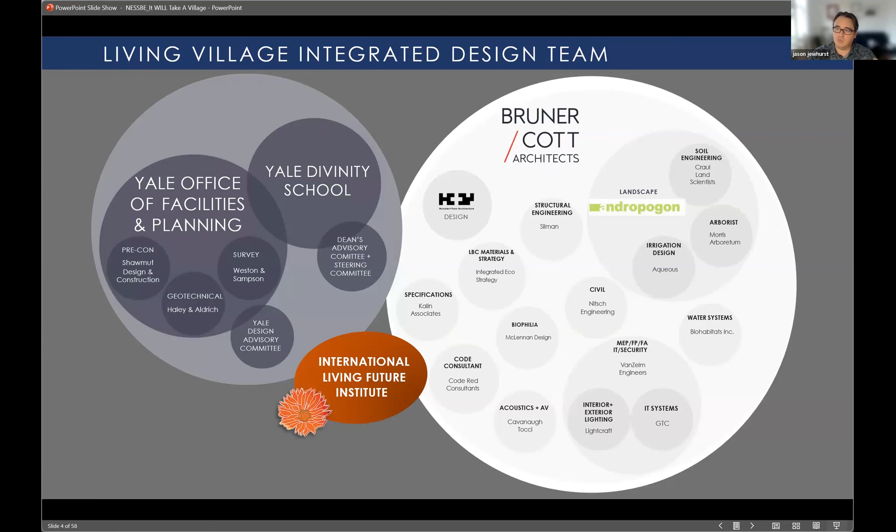We're also connected through this project to the International Living Future Institute. The Institute manages the Living Building Challenge building standard. We'll talk a little bit about that. This project from the very beginning, the Living Village, had targeted a regenerative design strategy that would be Living Building certified. So thinking through systems in a holistic way, we'll talk about that as we go through this.

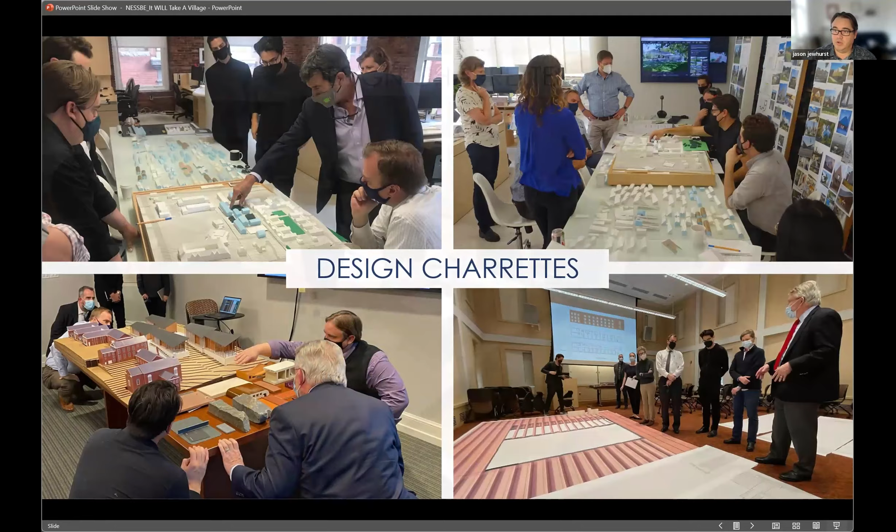I'll also say that we had a lot of fun, even though we were working through the pandemic, like many of us on the phone over the years. This design process kicked up in 2021. So we really kicked up the design process, and these were the first meetings we had in over a year that we were able to come together and think collectively about where we wanted the project to be. And that was rewarding. And like many of you, I'm sure, having that connection to large teams and working with the community.

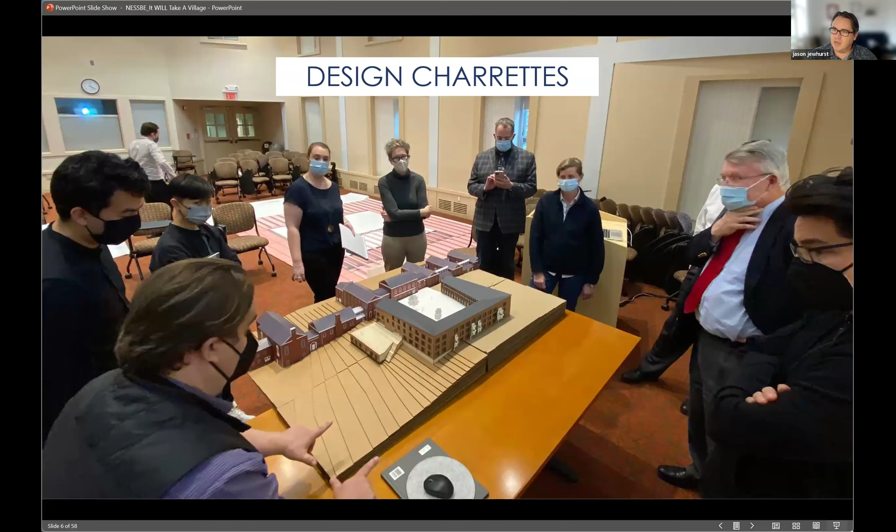So as we worked with the professionals on our side, we are also getting reflections and ideas from our clients. So really having an input that creates a shared authorship on projects like this. And we do think that that is such a critical part of our work, and having a true collaborative relationship with our team as well as the community we're designing for. And that's kind of how we think about it. We're only there for a very short period of time. The people living in these buildings will be there for decades to come.

So just real quickly, the vision for the Living Village. The dean had a vision over 12 years ago, thinking about how can we have our students who come through the Divinity School, how can they start to live like global citizens? How can they have a better relationship with the environment? And most importantly, how can we build community through architecture and landscape to foster these ideas and these conversations about how we live with the climate change that we're seeing? How do we begin to adapt? And then how do we develop behaviors that are more attuned and more connected to our surroundings?

And that boiled down into 4 goals. So it really is a training ground. They see the Living Village as a training ground for builders of communities that will go out into the world. Their students are generally going out into the world and helping people, making it an affordable place to live. Now, this is a graduate school at Yale where tuition is paid, but the goal for this is that the students that go to Divinity, if they show need, the goal is for them to go to school for almost free and $0 while they're staying on campus.

It's clear that most students that graduate from Divinity, they're not going into lucrative, high-paying or high net worth positions. They're going out in service of other communities. And this is a way to sort of make it more equitable in a place like Yale for students to come get an education and become part of that community, but not be burdened with the debt that so many students are seeing today.

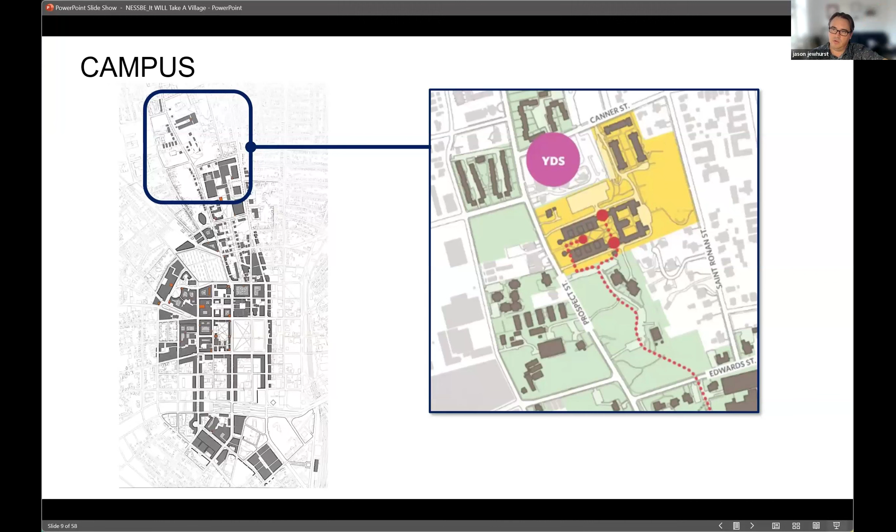And the idea and the design for both the landscape and the building, we're going to talk about this, is that in every way possible, it should be welcoming and inviting and setting a new course for them in the future. Just to give ourselves some context, if you've been to Yale Divinity School, then you know where it is. But if you haven't, it's up on the hill. It's a little bit separate from the main campus of Yale, and it's actually in the center of New Haven. But you'll see that it's a 15-acre site that has many historic buildings on it.

And what we're building on currently is we're looking at knitting together the landscape, removing this large parking lot, and connecting to existing buildings, and thinking about how that can work as one consortium of space. So a little bit about the Living Building Challenge. If you're familiar with the LEED certification process, if you look at Enterprise Green Communities standards, if you've read about WELL, what the Living Building Challenge does is it challenges the

group, and it also starts to think about, okay, as you think about LEED, as you think about sustainability, as you think about net zero, how can your project also begin to heal and regenerate and restore the surroundings, the environment, and the communities that they serve? So starting to think about pollution-free goals, thinking about not only creating enough energy to operate the building for one year as it moves in balance, but maybe generating a little bit more to give back.

So thinking about how buildings can be self-sufficient, how they can be more resilient, and how they can promote health and well-being through the materials that they're built with. So taking that step and thinking about what this project can offer beyond just minimizing its damage to the environment, but what can it do over time to heal that? On Yale's campus and in many cities, there are buildings that have been following the LEED process and going through LEED certification and pushing that elevation of sustainability and thinking about how buildings operate and use energy.

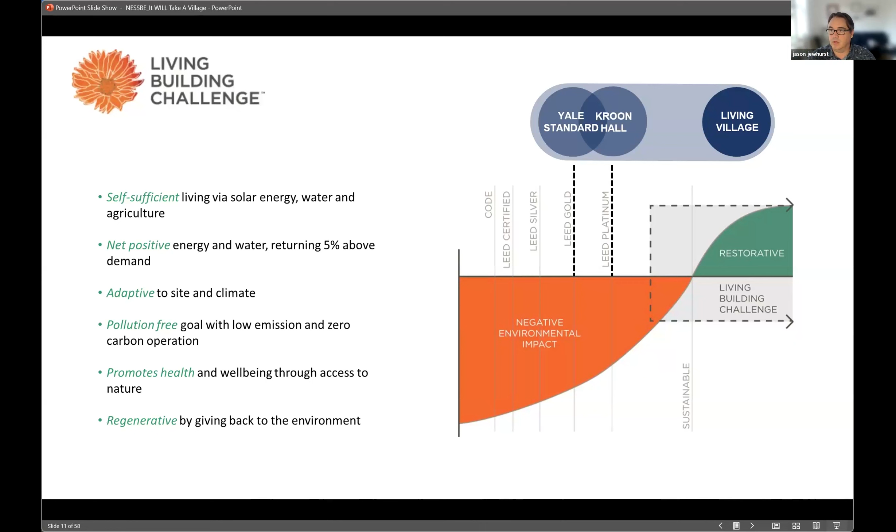The Living Building Challenge framework is, in a way, the first philosophy, advocacy, and building standard that brings together both halves of, I think, the mind and the brain, where it really focuses on the technical side in a holistic way of thinking about energy, water, materials, but it also starts to examine health and happiness. What does it mean for a place? What does it mean for a building and architecture and landscape to grow from its place?

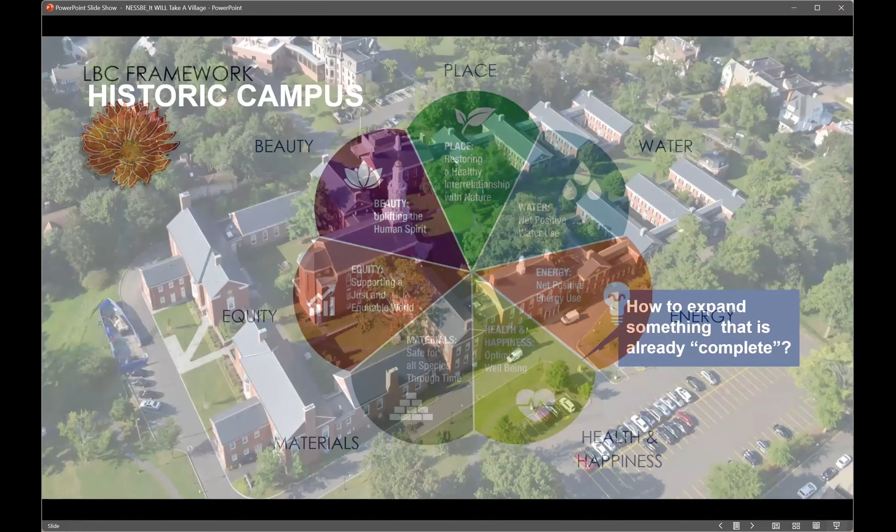Thinking about design and beauty as one, as sustainability, as thinking through this holistic lens. And then we're going to talk about equity in the materials as well. So thinking about how the buildings are actually built from materials that are not toxic. So thinking about a historic campus, expanding on a campus that's already built. It was built in the 1920s.

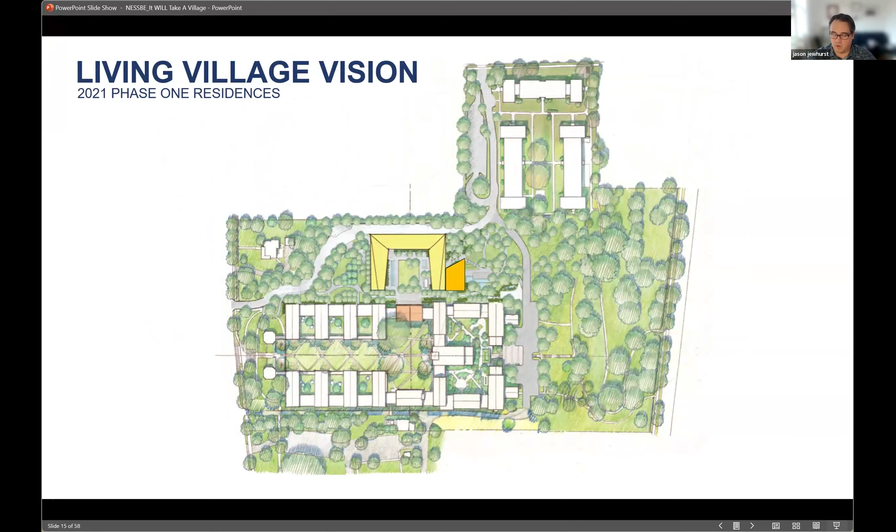It was renovated over the years, but ultimately you have a historic campus that needs housing closer to the academic building. So there is existing housing that was built in the 50s, and that's up on the corner at the top of the slide. And then the yellow is where the new Living Village is going to be sited and is currently under construction. So we're connecting the history and the architecture so that they're in conversation with each other.

And then just shifting really quickly, the vision was to bring a contemporary architecture that is at the highest level of sustainability and construction, but then having it be in conversation with the historic Federalist style, more modest buildings that are sort of sloping along this crest of the site. And this is the highest point. We're at the top of the watershed, which will be an important note as Jose talks through some of the site conditions. And with that, I'll hand you over to Jose.

So this happens to be located, if you go to the next slide, which is a bit more elaborate than the slides that we saw before, Jason. This first and foremost begins to actually knit the project with the rest of the elements that form this community in this part of New Haven. So there's the intention of connecting with some existing trails, taking advantage of certain institutions that are nearby, botanical gardens, farms and so forth, and make sure that this is outward looking, as opposed to inward looking, as Jason was making before. So we wanted to create something that was very permeable.

Now, being located in this particular part of the campus and regionally, we are at the top of a ridge line. The SDQ, the Sterling Divinity Quadrangle, actually drapes over the center, in the middle of a ridge line. So the building, in that regard, if you go to the next slide, please, is located right at the top of a watershed. Imagine that axis north-south that you see here right now. Water is going to fall to the east and to the west, so it's the highest place in the watershed. And I think that water becomes such an important element that begins to organize and respond to that responsibility that it has. Next slide, please.

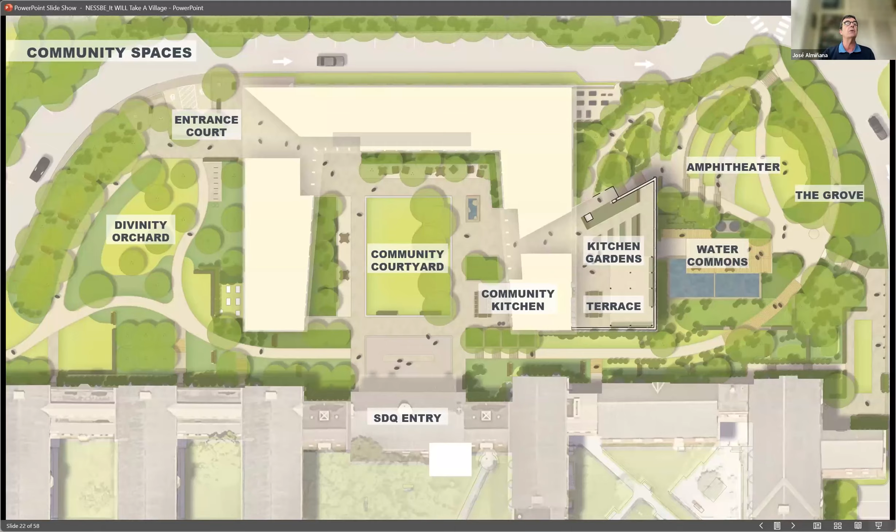Next, please. So with that in mind, we think about the campus connections that this plan enables, the connection to the deanery, the connection to the slope down to St. Ronan's, the connection to the courtyards inside of the quadrangle, and so forth. But it's, as you can see, very porous. In the next slide, you will see a diagram that describes the entry points of the village and how you move through it, in a way that has to be 100% accessible and universally accessible. Next one, please.

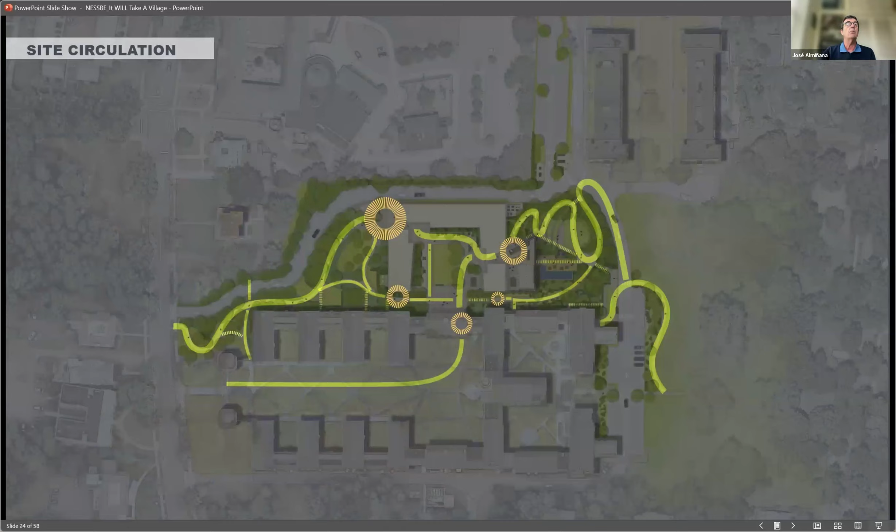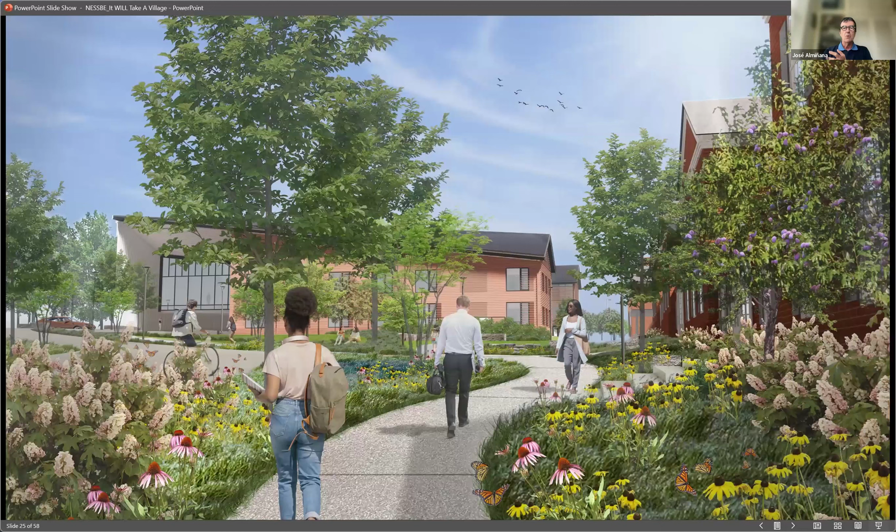So when you look at the next slide, it is a rendering of the fundamental pedestrian approach to the building. Go back to that one. You can see the intention of actually moving through the landscape. Everything that you see in this slide in yellow is a fully accessible route, so anybody with any disability can actually come here. There's a few places highlighted in red where we have steps, because after all, we're negotiating a change in grade upwards of 25 feet from the top of the ridge line to each edge of the campus.

Next, please. So you can see how the building is located on the site with the ridge line, with gravity working for us on either side, and the relationship to the entrance to the Sterling Divinity Quadrangle. And the next slide tells a story about how we are going to deal with water, because one of the imperatives of the Living Building Challenge is that we're net positive. We want to live off the water that is available to us on the site. So here we can use gravity, which is free, to move water to the places where that water as a resource can actually be utilized. And by the way, there's only one water, and we'll go into that in a minute.

Next, please. So the idea is that because we need to host a program here, the areas that need to be by definition impervious, i.e. the building roofs, are where we can collect the water from the sky and then direct that water to a series of cisterns where we can actually manage it and use it and reuse it on the site.

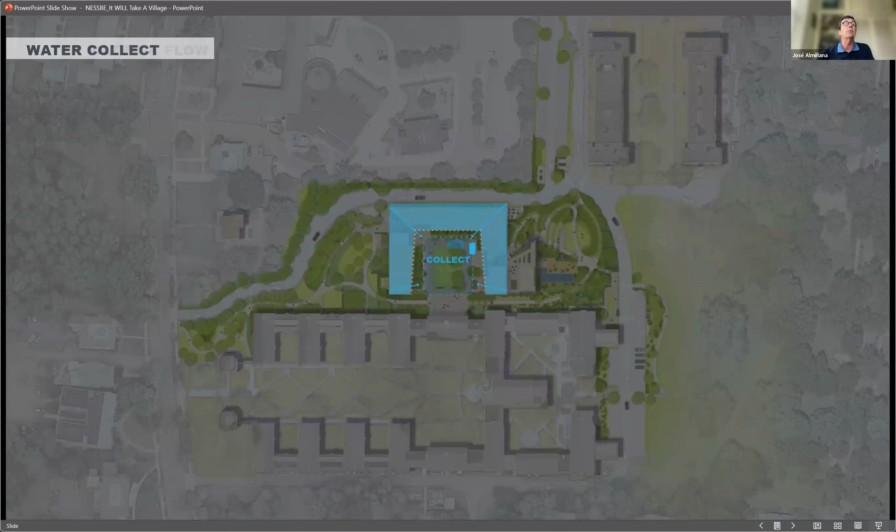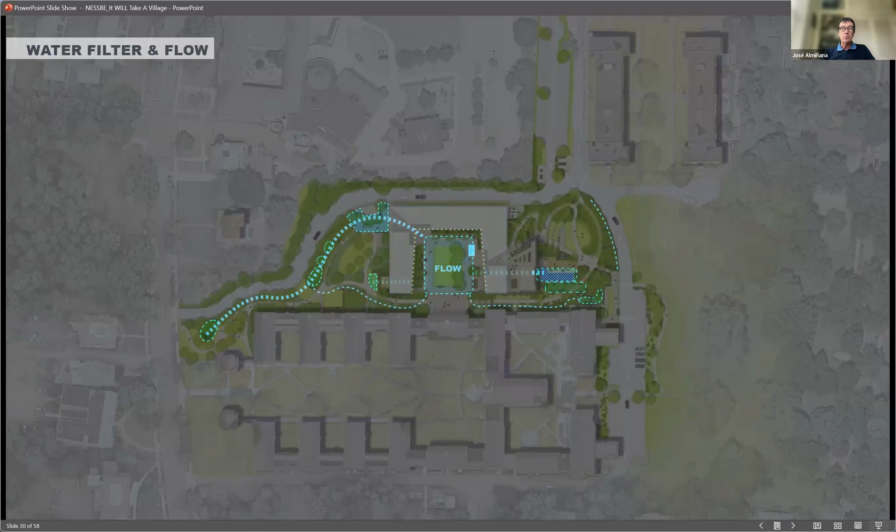So next slide, please. You will see how that water is actually directed from that high point through a series of landscape elements that would actually purify that water and actually manage what at the end of the day is a 100-year storm on site.

And that's done through a series of interventions that have to do with materiality, with alignment of the paths, and all that circulation that you have that is accessible. It actually follows that movement of water. So you are in contact with this aspect of the functionality and the living systems of the site as you navigate through it. Now, on the water question, the next slide is a little bit complicated. We'll try to make it simple.

This diagram here, this spaghetti diagram, is actually describing how the water that falls on the site is actually managed. So the next slide will show you where the water comes from, and it comes basically from three sources: either collected by the roof of the building, as I mentioned before, falls on the site from the sky, or is actually supplied from the municipal sources from the city of New Haven. That water actually is used in a series of different ways.

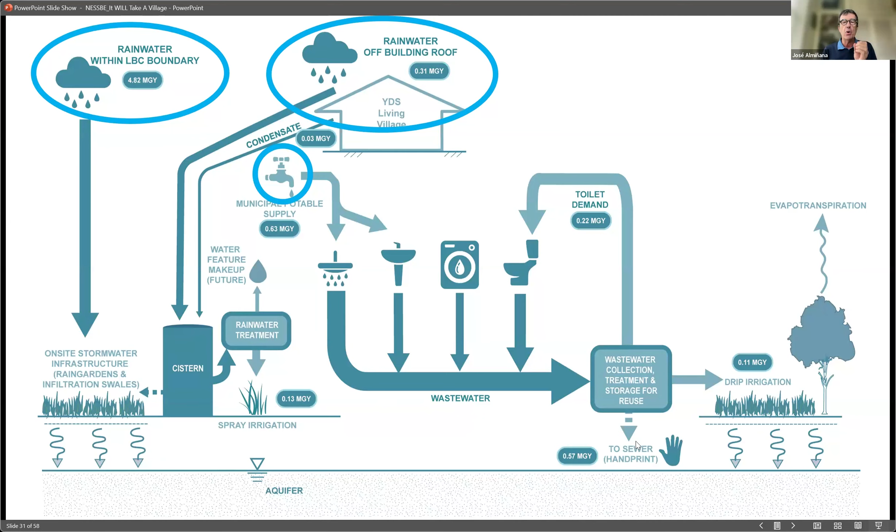In the next slide, you will see how that potable water is utilized for... becomes wastewater as being used through lavatories and washing machines and it becomes part of the wastewater system. That wastewater is then treated and collected and then reused for toilet flushing, or is used for drip irrigation on the site.

And the rainwater, which is the cleanest water that we have, we're actually going to take it to be able to irrigate our site in areas where we're going to be in contact with people. So we want to take the water from the roof of the building, put it in a cistern, and actually use it for spray irrigation of the site in areas where we want to actually grow food or need to maintain turf areas.

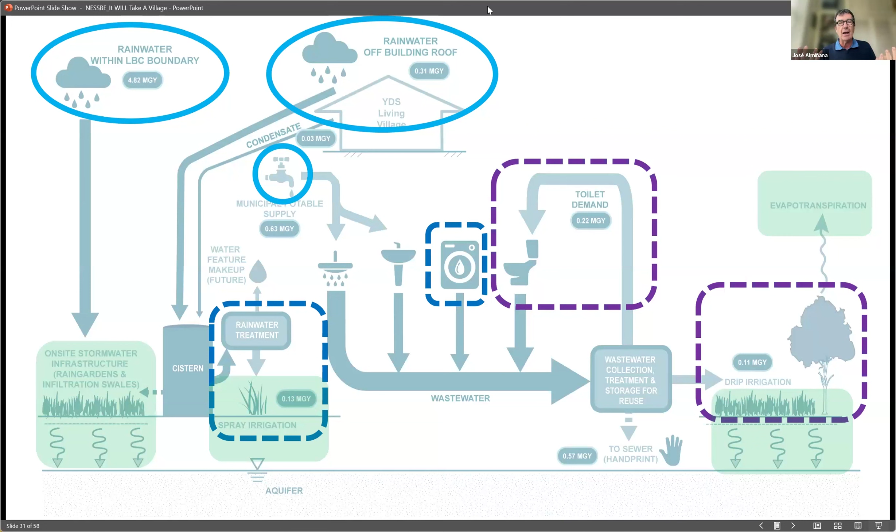And then lastly, in green, we reconnect that water cycle and put that water back into the groundwater system, right? Or evapotranspirate it, and then the water completes its cycle. And remember, there's only one water coming here. There's no water coming from anywhere else. It all comes from the sky, and it all goes back to the sky, or becomes part of the groundwater system, which we pump out and then make part of the hydrologic cycle again.

So next, please. How that engages in the building is rather elegant and simple here. The water is collected by the roofs, goes through a series of vessels and a series of pieces of equipment that actually treat it and manage it. Next, please.

Then it goes down towards what we call the water commons, which is where the water is actually collected for reuse, but actually the wastewater is circulated through a series of constructed wetlands where solar aquatics and the life that exists in the root system of these plants actually takes that waste, quote unquote, human waste, because it's natural waste, and it actually becomes food for the plants.

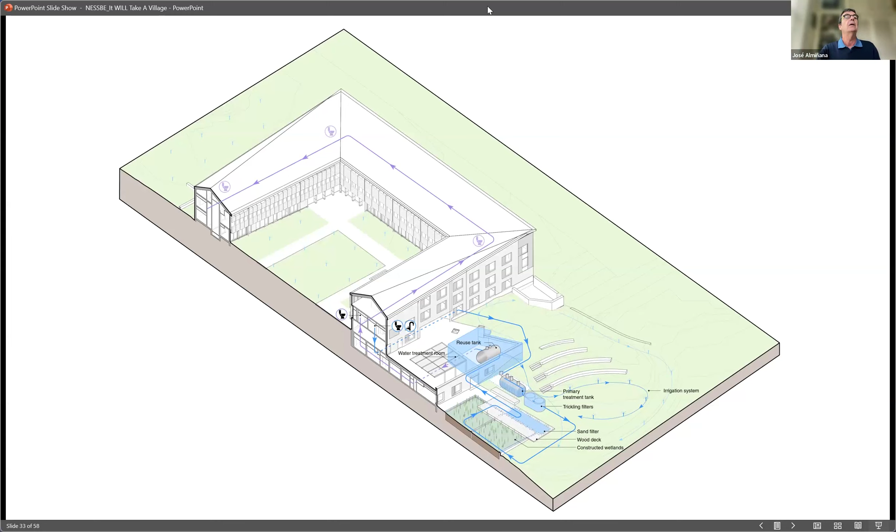And then the water is cleaned through photosynthesis in living systems. And then that water is utilized again for irrigation of the landscape at subsurface levels, or is used for toilet flushing, because that's the way we move waste in our sanitary systems to date. And next, please.

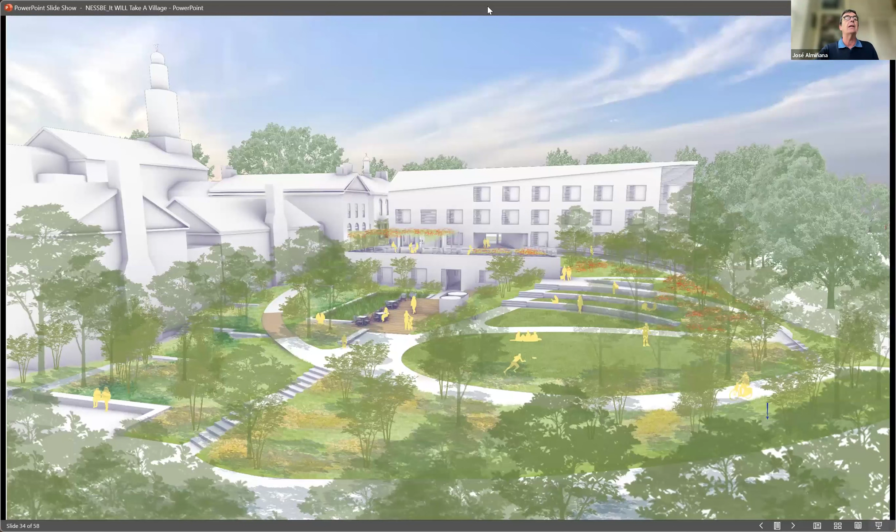Here is the eastern slope, as I mentioned before, which is the one that affords these spectacular views, but it's also where people can get in touch very directly with the way the water is managed. And this is completely integrated into the landscape features that you would see in the next slide,

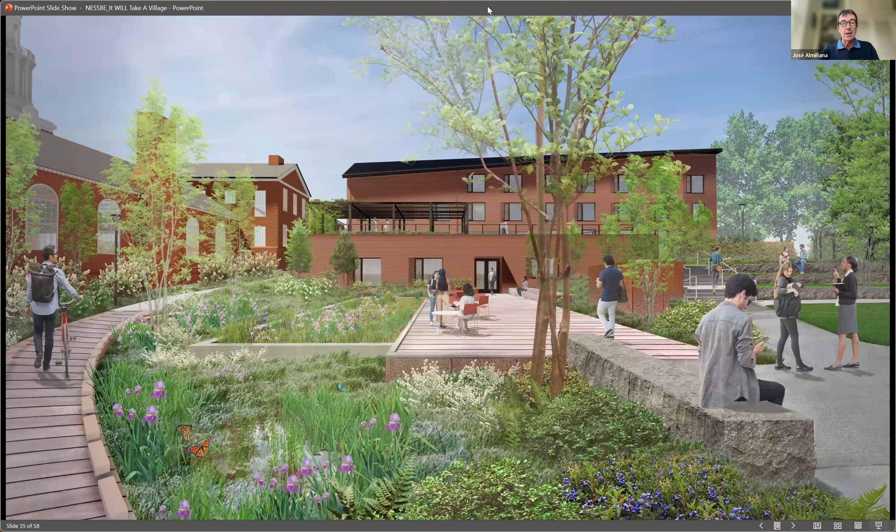where we have boardwalks that go over vegetated swales that manage rainwater, or you see decks and then constructed wetlands that actually are managing the wastewater. And it's all the same water, it's all integrated into place, and it's all experienced by everybody because it's completely accessible for people to understand.

Jason? Yeah, and so similarly, just quickly a review of how energy moves through the project. So this we call the U shape or horseshoe shape building. We were met with balancing contemporary new architecture that needs to generate electricity and power through renewable sources, but then also thinking about the context of the buildings that are on site already.

So thinking about these gable roofs, one of the elements that we wanted to bring forward in this design was to have the building shift its focus to what it is intended. So the roof is intended to provide shelter from the elements. It's collecting our water, as Jose just walked us through the life cycle of water as it falls on the site.

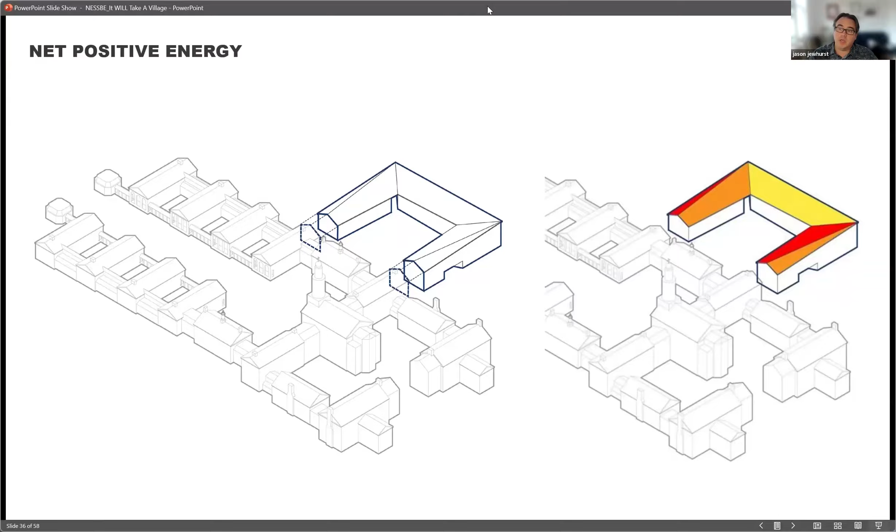And it also is to generate power. So what we were able to do was shift as the building wrapped around each side. And many of you probably know this, but I'll just say it: when we talk about energy being generated, we look at all roof surfaces in New England. So when you have a gable that faces east, west, or even south, those are all energy generating surfaces in the Northeast, because of the azimuth of the sun, the way it moves through the site.

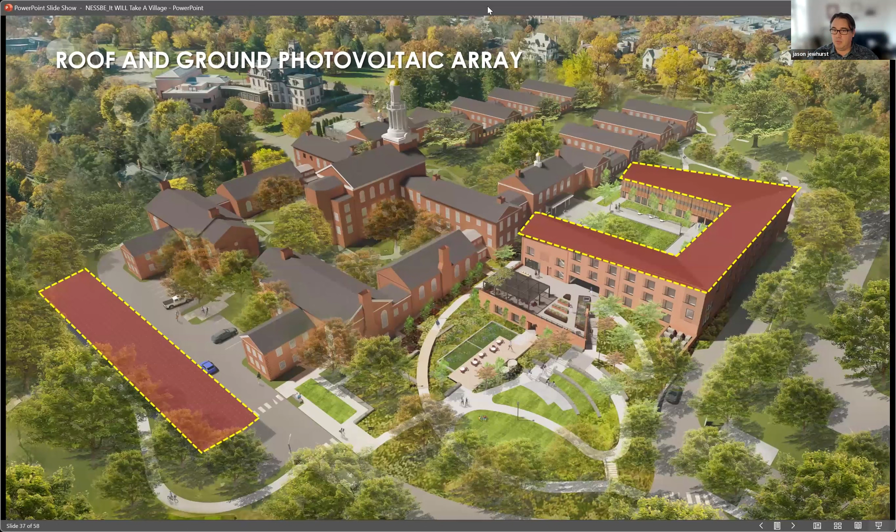So we have the benefit of having the sun move along the south axis, which opens up the roof and the architecture to capture 100%. So every surface of this roof, when we shift to that large shed roof that's not visible from outside the site, that's the entire south-facing roof surface. We are collecting other energy from another ground array that's going to go over a much smaller parking lot to the east of the site.

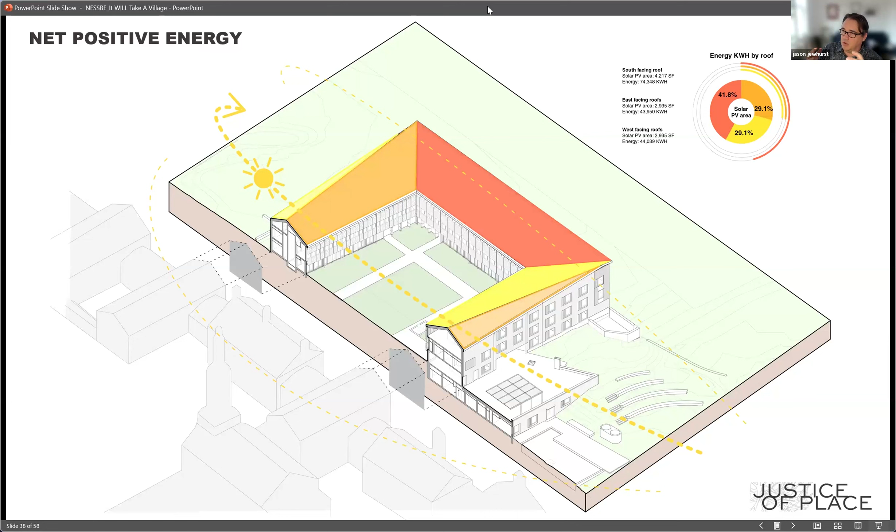But for the purposes of what we're talking about today, we're generating almost 60% of our power on east-facing and west-facing roofs. The other 42%, which is much more efficient and higher output, is being collected on a south-facing roof. So thinking about how the architecture tells the story and supports regenerative thinking, this enabled us to create a project with architecture that reflects and follows the sun, almost like a flower, or like how your garden moves over the day. This is doing the same thing. And with that, I'll hand it over to Gretchen.

Yep. So thanks. Jose and Jason have both talked a lot about the technical and the infrastructure that is a big part of this project, and it's what LBC, the Living Building Challenge, asks us to do. But the other petals I'm going to talk about are equally important. And that's what I really like about LBC versus, say, LEED programs, is that it takes things like equity as an equal petal. And so that is really about making community. This is a dormitory or grad living housing, but I think it's pretty applicable to co-housing models or multi-generational models of making community.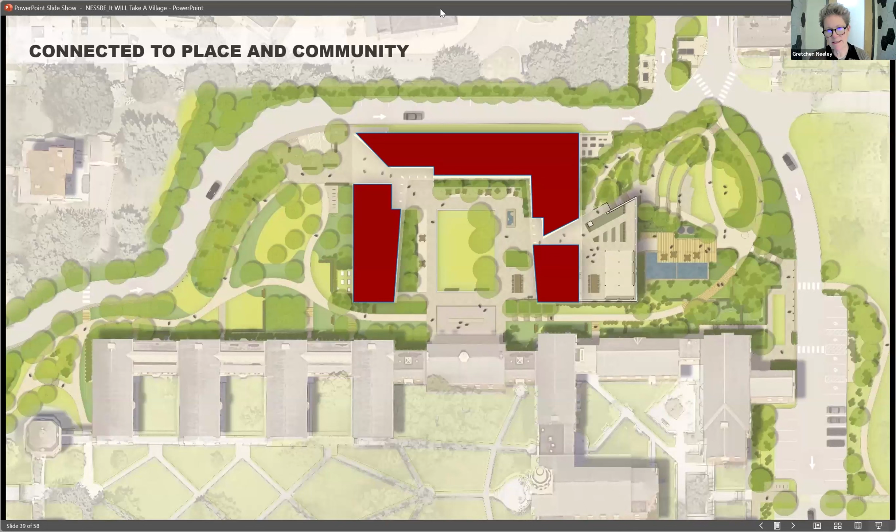And so, as Jason said, we did work with the context of a courtyard that's all throughout the Yale campus, and particularly the Divinity School, the Jeffersonian model that they have for their existing building. So we took that context, but we opened it up as much as possible. So there's a very large portal entry that invites the neighborhood into the courtyard, and then a second portal that brings the landscape and the views in to that central courtyard. Next slide. So that was just context of some of the gateways on the Yale campus, much smaller, but you do get glimpses in. Next slide.

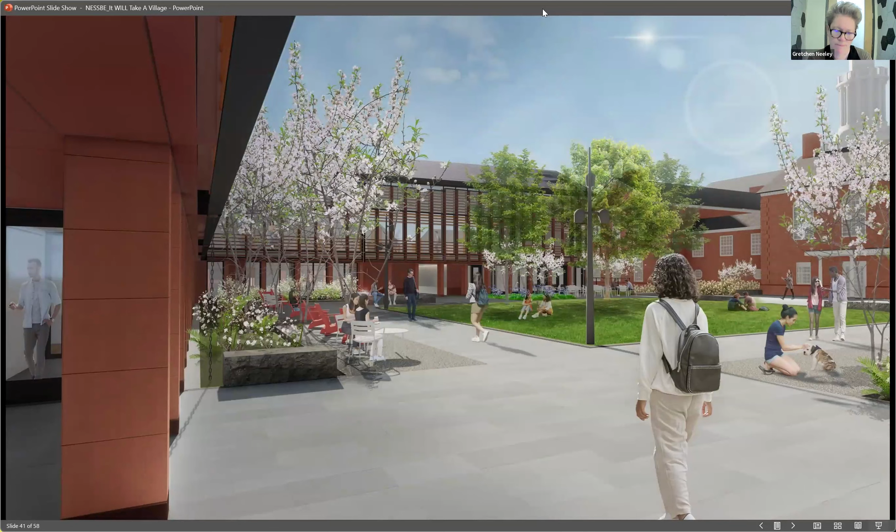And this is the image of the courtyard once you've gone through the portal. We imagine lots of different kinds of activities that can happen in this space to foster community. Next slide. So thinking about programming was really important. We knew that this would be a dormitory for housing, a living space. So there certainly needed to be particular square feet for bedrooms and kitchens and bathrooms, and that's a given. But the living space, and as Jose has talked about the landscape, was all about making community. So our program was more than just the basic square foot needs; it was things like chance encounters. How do you make community?

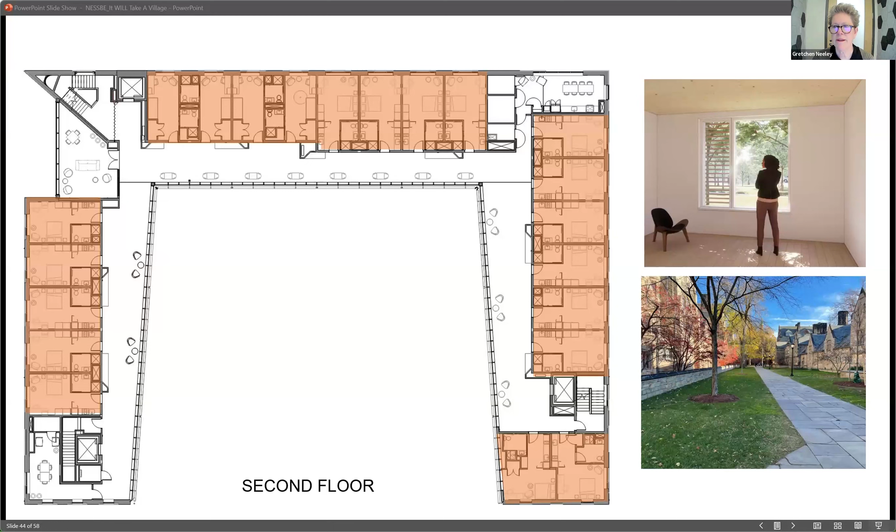So one of the things that we did, and this doesn't happen in the Northeast much at all, it is a more southern type of layout, but we did use the single loaded corridor. And that really worked for us to foster community and addressed issues of equity, so that the courtyard was open to everyone. You didn't just have, well, I'm on the courtyard side or I'm on the back side. So everybody has a view from their single rooms looking out, and then everybody gets to share the courtyard. Next slide.

So you can kind of see what that does, right? That the corridor spaces widen a little bit with that kind of skewing so that we could then furnish it with some social spaces, but then everyone participates in the kind of community space in an equal manner.

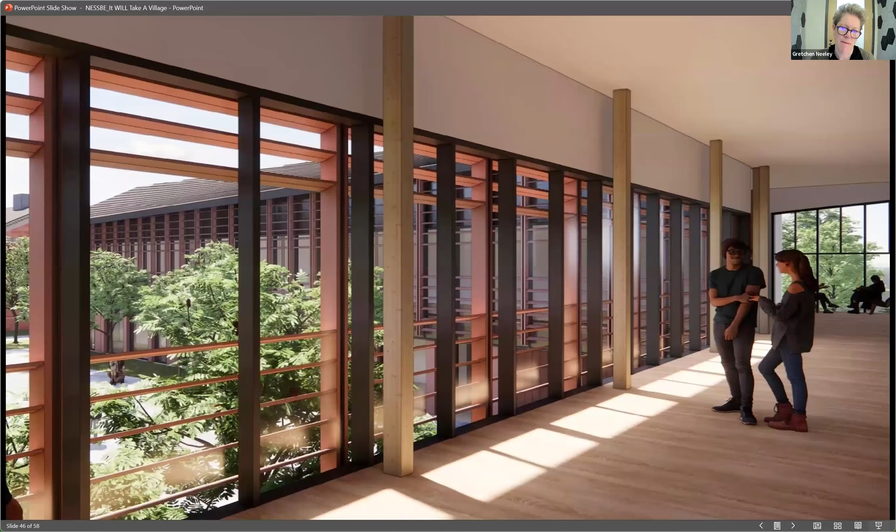And so that's the rendering we did early on of that kind of living, the corridor space where you can look down. One thing is that's essentially a curtain wall. We didn't want everybody to get too much solar glare, so we worked to have a series of louvers, which help to, in the winter months, bring the sun into that corridor, and in the summer months kind of dampen a bit the solar glare that comes into that corridor.

Next slide. One of the things that we thought about, right, with these chance encounters are issues of the fire stairs, for instance. So we tried to use warm materials. We have natural light that comes into the fire stairs so that there again is a kind of sense of place and space. The other thing you can see in this diagram to the right, the yellow is representing the more social spaces.

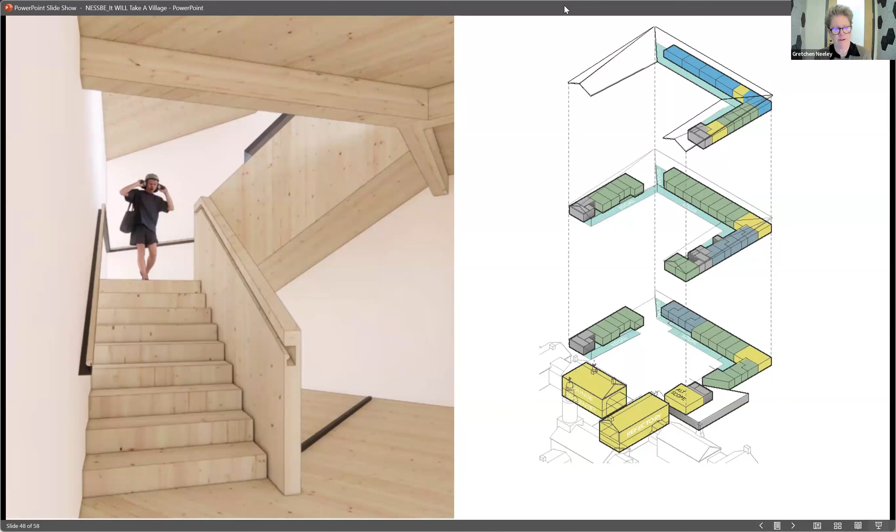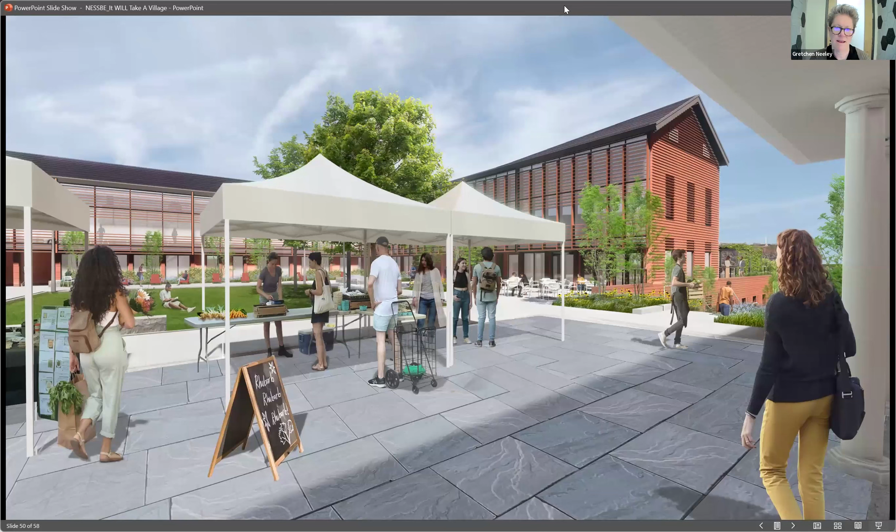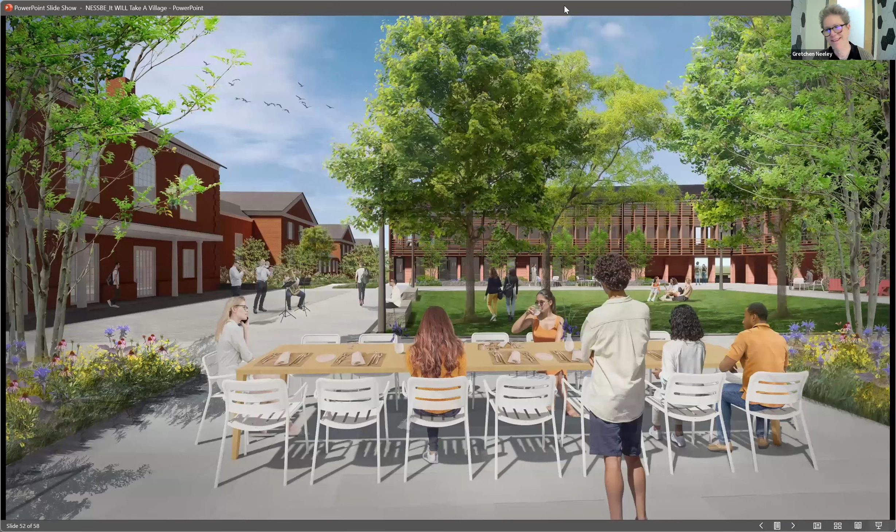Next slide. This was a rendering we did of the courtyard, imagining different programs that could happen within the courtyard. So a farmer's market or potentially a flea market. There's a kind of green space and then some paved spaces around that. Next slide. So we have furniture that can move out. There's a large set of doors on that community kitchen, so the eating can move to the outside.

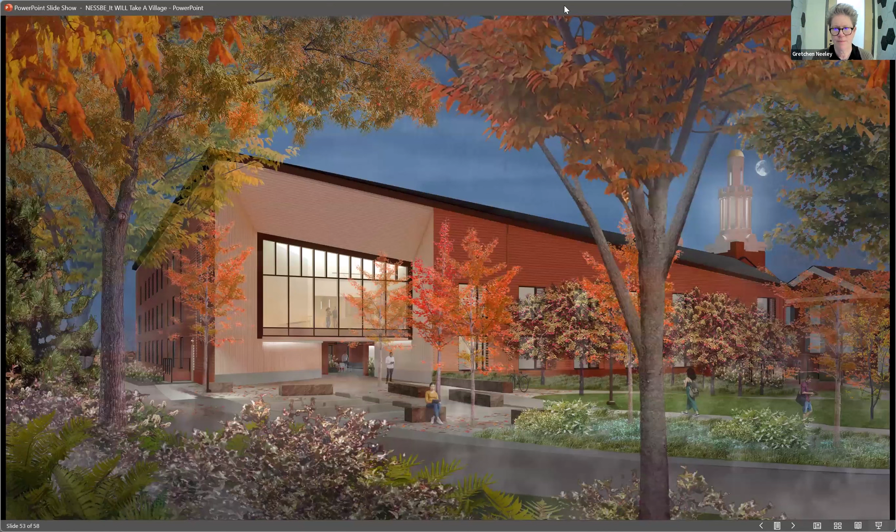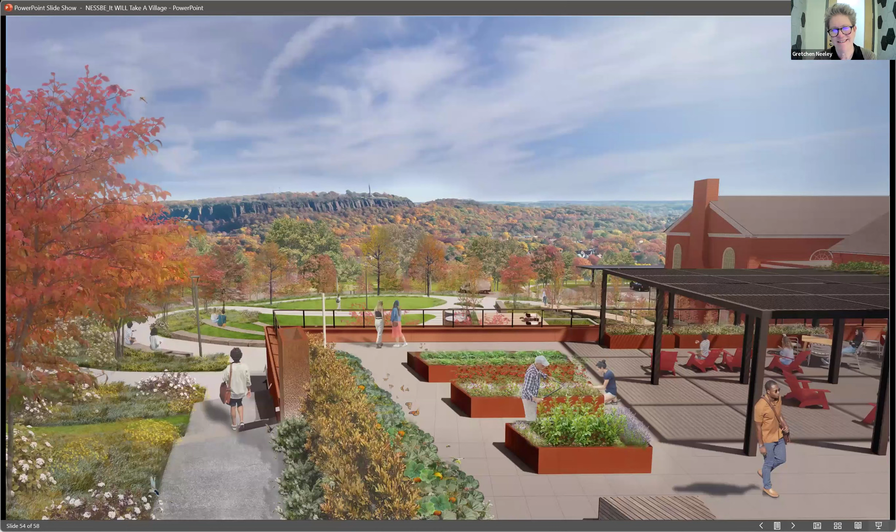And next slide, and lastly, this is kind of the view as you come through the second portal and you look back out over East Rock, over the landscape. And we've got the series of smaller little community gardens that happen on that terrace. And I think then the next slide is really where we are today. As Jason said, it is well under construction. So we are in the thick of it at this point.

Yeah, and just one final comment, thinking about how you view from buildings to buildings and from landscape to other spaces. I think that was a big part of identifying views and also creating spaces that have a sense of security and safety with them, that no matter where you are, if you're one person or many people, you're in a place where you can visibly see where you're going. You can see people coming.

And that's a big part of thinking through landscape as it weaves through the buildings, as it weaves through this campus, and coming up with concepts and ideas that reinforce chance encounters, as Gretchen mentioned.

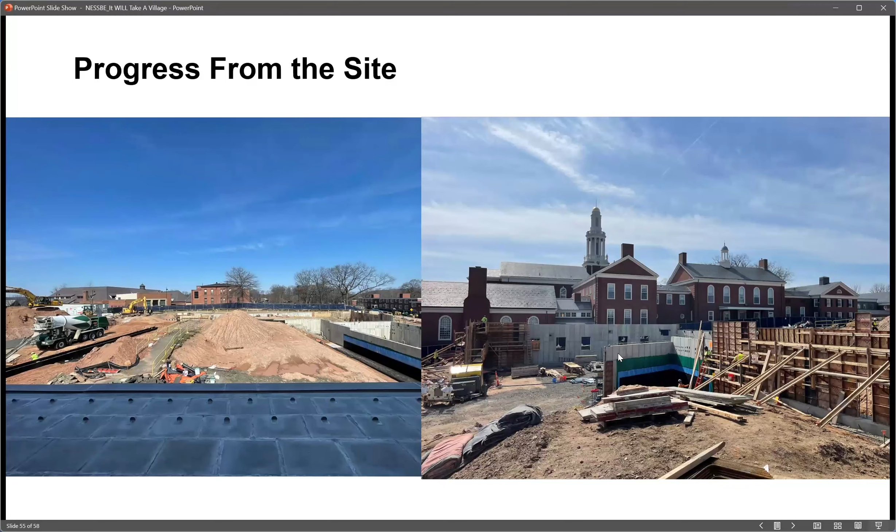But I'll start maybe with a couple of questions that occurred to me during this. One, the single loaded corridor decision that you were talking about, Gretchen, that you made. So that's a classic passive solar strategy, right? It is mainly south, southeast, and southwest facing, right? Yes.

So the materials in the corridor and the floors and the walls of the rooms, is that going to be designed to take advantage of the passive solar, or let's say constructed, more material choice about that? So you're absolutely right that the single loaded corridor is more where you are, your neck of the woods in Texas there.

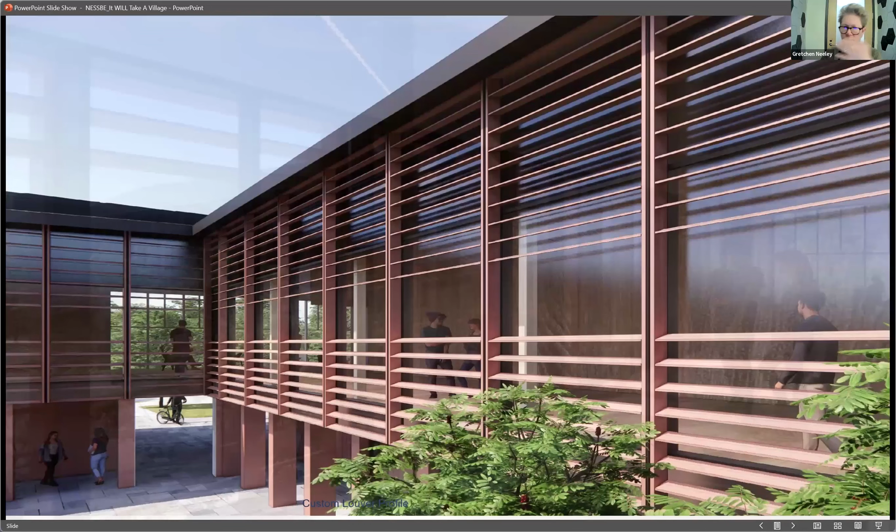The materials, so we are using all triple glazing along that glass facade. So that certainly helps with the solar. And then as I showed, the louvers in front of that allow you to look out, but help to mitigate the solar glare. On the opposite side in the rooms, the entire project is using a very simple set of construction.

So we do have cross-laminated timber, so CLT floor slabs, and then we use really wood construction. There's some shear walls, but it's 2x6s with plywood on either side. We have some LVL, so there's a wood structure in there that you can see, the columns, and the bedrooms themselves have wood flooring. So I think the materials help to soften some of the glass glazing on that side. I'm not sure I quite answered your question, Deane.

No, that's okay. I think Gretchen, you're right on. I think also, Deane, for high performance envelopes, the passive solar considerations are a little different, where we want to make sure that we shield, for buildings like this in New England, you run into a condition where you could actually need to bring cooling into buildings in the winter, because they do get really warm with that low sun. So this is a way to balance that.

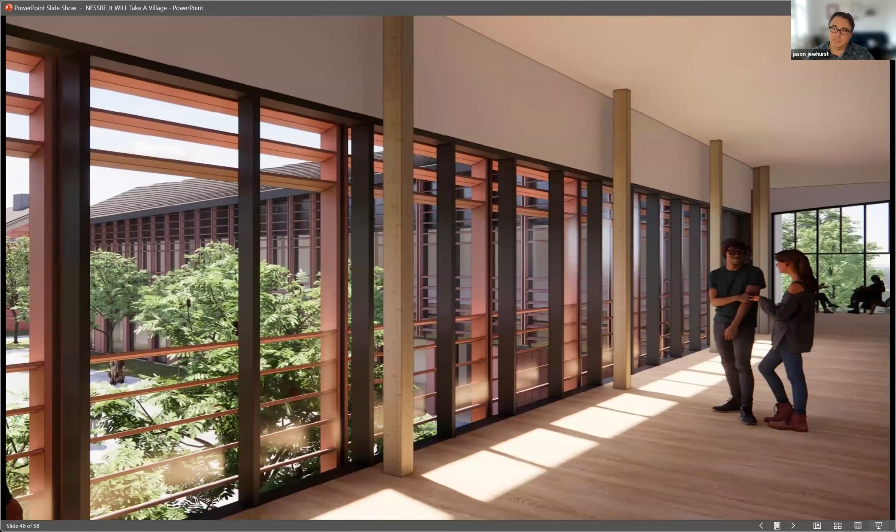So I think to your point, Gretchen, because we're using wood, we're not looking at mass storage as much. That's what I was asking. Yeah, we're not using a mass storage system as much because, number one, the ambient temperature of timber and wood will be pretty high. So it's not cold materials like steel or stone inside the building. So that will also help with comfort. But with the high performance, we are doing a lot to manage, and it's all mechanically ventilated.

There's an opportunity that if you can balance those shoulder months, you'll basically just need to ventilate the spaces and you'll have free cooling and free heating for those months. It'll be mechanically done. But in the winter months, we're trying to make sure we don't have to kick on the cooling system. So what this does is balance that, but it's a great question.

And what we didn't show, it'll be in our next presentation, is the outer walls. Right now I call these the inner courtyard walls, but the bedroom walls, we do a double-stud construction. It's basically an 18-inch thick wall where we are filling it with recycled insulation. So we reduce our carbon footprint by using the recycled, plus we have a super tight insulated exterior envelope that helps with heat loss or cooling loads that we would need.

Gotcha. Okay. Kathy has her hand raised. You next, Kathy, after Paolo Campos from Patriquin. Do you want me to read this, Paolo, or do you want to unmute yourself and ask the question? I'm happy to jump in. Perfect. Thank you, Deane. Awesome presentation, guys. Really beautiful project. Can't wait to see it.

I hope there are opportunities for tours of the site, not just for organizations like this, but I know Yale architecture students and Yale School of the Environment students would really benefit. As I said in the chat, I'm a nerd for this kind of stuff. So I was hoping you could talk about some of the optimizations made during the design process for embodied carbon, if any, beyond the mass timber.

And then if you can talk about the materials petal as it relates to the Living Building Challenge, because that's had a huge impact on our practice at Patriquin, but is also an ongoing challenge with the red list and its evolution, and things inside and outside. And then throw the overlay of it being Yale and institutional on top of that, so navigating the facilities side of things.

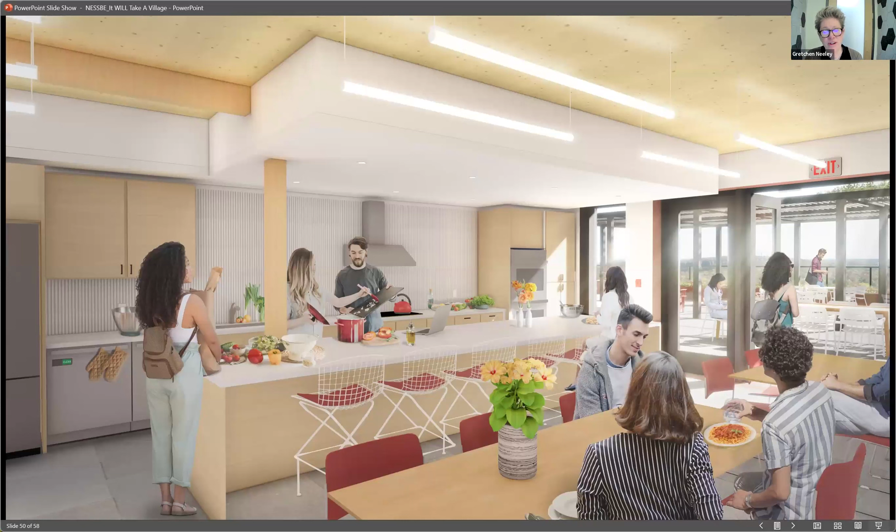Jason, do you want to talk about embodied carbon first? And then I would be happy to talk about the materials list and how we did that. Yeah, sure. And I think right in the thick of it, I want Jose to get in on the carbon too. But from the building standpoint, it's a great question, Paolo.

So we went after the big systems first, right? So let's build the building out of wood. Let's use materials that, if they do have a high carbon in their manufacture, let's make sure that they have a long life. So through using terracotta cladding, locally manufactured in New York through Boston Valley, and using mass timber, and using low carbon systems.

And as Gretchen mentioned, using a non-thermal plastic exterior wall envelope is a huge contributor to keeping the building light in terms of carbon. So when we're looking at those systems, this is a system that we've tested on a few other buildings, and we've been successful with creating high performance envelopes without thermal plastics. And I think that was probably the biggest step.

And then where we did have to spend more of our carbon budget, we made sure that it was equally tied to performance, like triple glazing. This is not a building that can utilize or would be in the budget for vacuum insulated glazing, and double glazing would have had significant impacts on its building energy use. So managing those systems was really the critical part.

But Jose, we've been talking about the foundation and concrete for months, and also there's a carbon story with the site. Jose, why don't you, I think it's an exciting topic because we're balancing the building, but we also have a site carbon balance that we have to manage too.

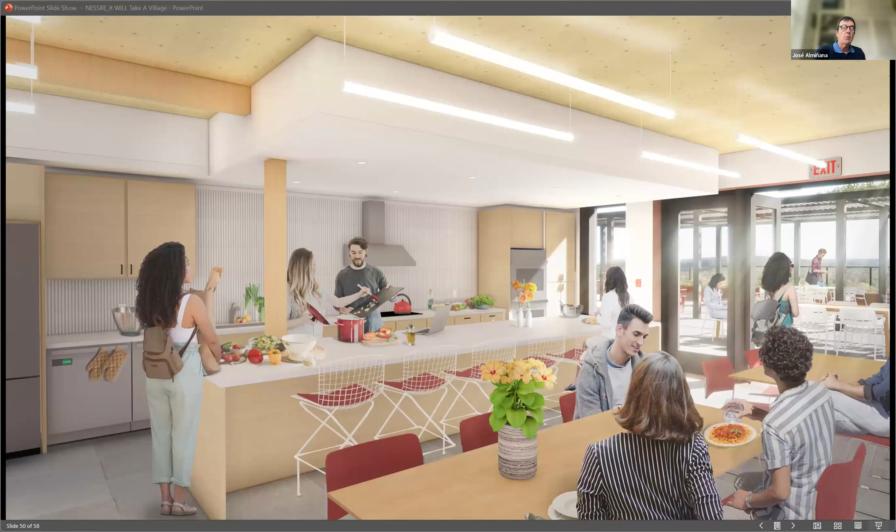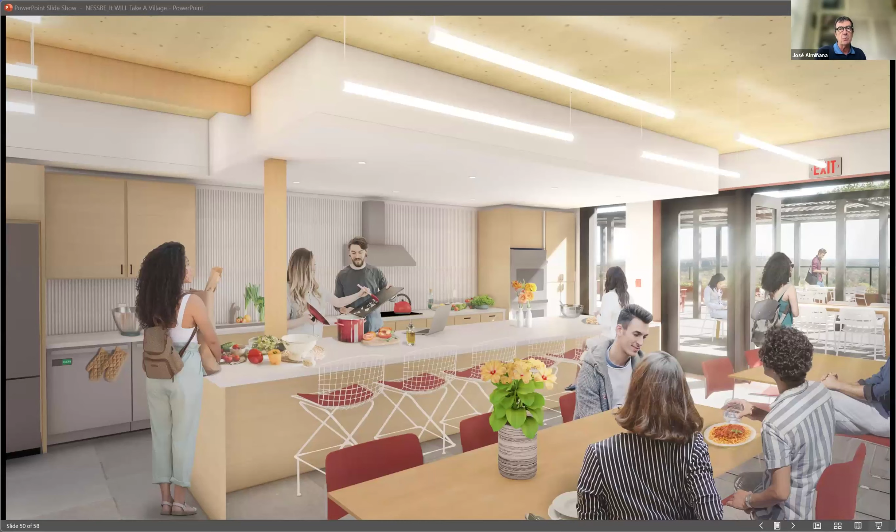Yeah, I think what we know is that 8% or thereabout of emissions are directly connected to production of cement, which is the main ingredient for concrete. So we've made an effort to reduce the cement content in the mixes by increasing the cement substitutes as much as 50%. We know there are systems right now that can probably offer something closer to 60 or 70%, but they are not readily available and were not an option for us here. So we're using more fly ash and slag and things of that nature.

We're also looking at right sizing the footings. And all the exterior walls are going to be brick veneer for durability, and they have to have a stem wall of concrete. We're trying to reduce the amount of concrete after it's been designed, and as we go through shop drawings, trying to minimize the volume of concrete, because the greenest cubic yard of concrete is the one that is not poured. We know that.

But the other component is that we have in the landscape the capacity to sequester carbon through photosynthesis. As a landscape architect, it's something we're looking at very carefully. There's really no more elegant way to sequester carbon than using plants, but it's not the solution. We're not going to get ourselves out of the hole planting trees, because with the longevity of the trees it's very difficult to come up with a planting that is going to be carbon neutral, believe it or not. So preserving trees was very important on the site. In some cases we could not afford to replace them, but we're tripling the amount of trees that were there on the site originally.

We're also looking at soil systems that are manufactured, so they're not using topsoil, but that are focused on performance, trying to bring in the greatest amount of carbon sequestration possible by root systems in the landscape, and also amending and modifying the soils. We're looking at the possibility of incorporating biochar, which is a very stable way to bring carbon into the soil. So all these things are part of the carbon equation, as well as the effort to reuse water on the site and limit the consumption of water, which I think is very important.

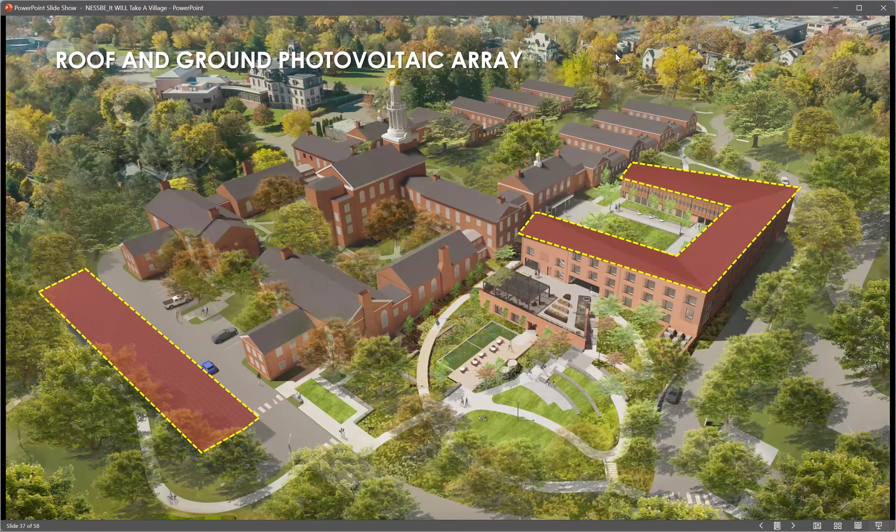So I have many other questions, but I defer to others. I don't want to monopolize things. But thank you, guys. This was awesome. Thank you. Thanks, Paolo. Kathy Jorgen, you had your hand raised? Yeah, I have questions, comments, and I'm looking forward to that next webinar because, like Paolo, I have a lot that I want to learn from this. This is a fantastic project and so well presented and so interesting.

My main question is, you have a group of people who clearly were committed to begin with to a high level of achievement, both socially and environmentally. Can you talk a little bit about how participating with the Living Future Institute changed your thinking? And I'm particularly interested in this because I've just joined the affordable housing demonstration. So I look forward to learning from you.

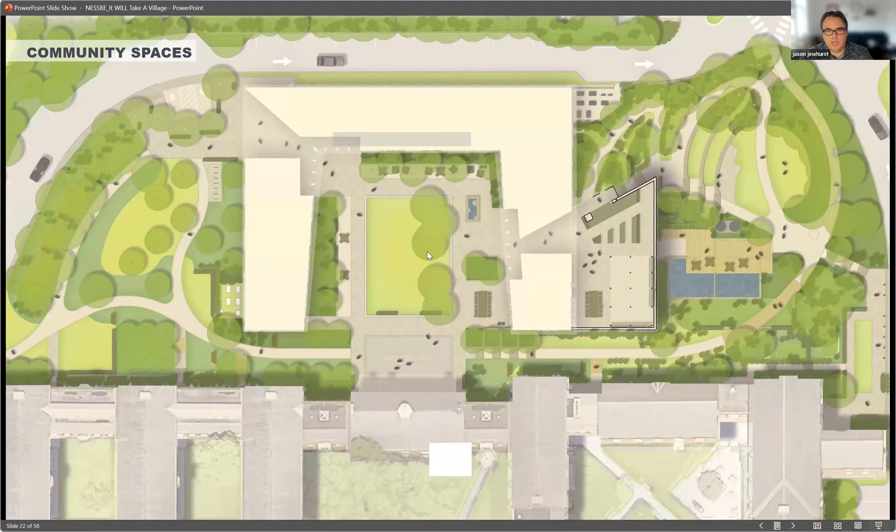Yeah, that's a great question. And I think also it starts, when we think about projects, with the fact that no one's done this before, right? So even in affordable housing, when we think about how we begin to bring the same ideas, philosophy, and vision to affordable housing, that's where we really get excited. We're doing testing here. We're getting it to a place where it can be proven, and then we're moving that into more markets.

I think it started with, and Jose, I think this is actually where, Jose had been working on projects that had gone through, and Jose was coming off of the Phipps Conservatory expansion building that was done several years ago, and thinking about those philosophies. So it was about 10 years ago, maybe even 15 now, where we started connecting once a year.

We were on a resource committee that met monthly. But that's where we started to really unpack culturally, how could we achieve this, or how could we approach this from a firm's perspective? How could me and my partners figure out how to test this, even though we hadn't done it before. Before this project, we worked on a smaller project up at Hampshire College called the Kern Center. And that's where we kind of cut our teeth on a lot of these discussions in the Northeast.

In the Northeast, it was quite different because there weren't a lot of large projects being done at that time. And we were, with Jose, some of the first commercial projects to come out and try to achieve the Living Building Challenge. So I think the idea is getting into that network and starting to meet the folks that have gone before us, and also what we learned. I learned so much from teams that were struggling and grappling with things that we hadn't really encountered yet.

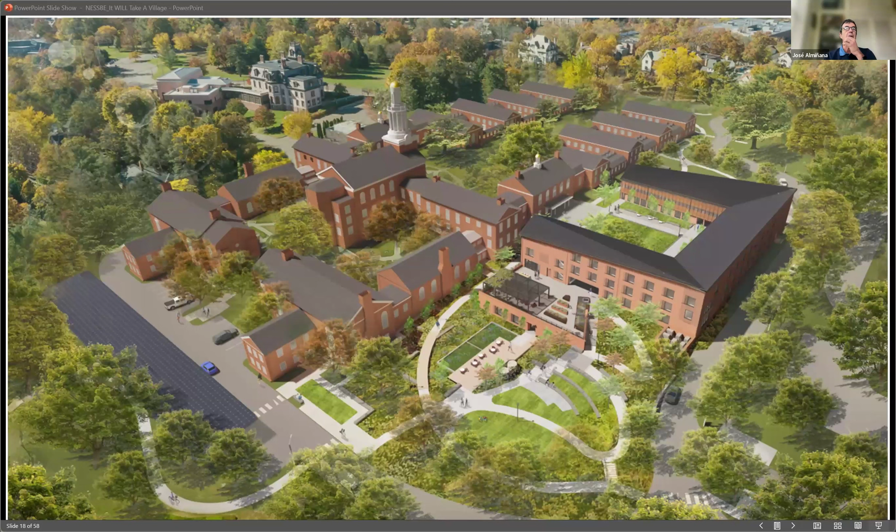Terrific. We did an LBC project for Georgia Tech, the Kendeda building, and that has a more traditional array of photovoltaic panels. And I remember very early on the discussions about the structure and capturing the water and keeping it clean, and the gutter system was integral to that conversation. So it's a little different, but if you know that you're doing it from the beginning, I think that it's absolutely achievable.

It takes me back to high performance schools work that I was doing in the early 2000s, and a lot of people were talking about cisterns in schools, new schools, even re-roofs, and it was an interesting process. It's come a long way, particularly when you start marrying the two together, energy and water. It's a nice cycle. I think that the connection of water and energy is not clearly understood. Well, we'll get micro turbines up there with the water coming off the roof, and that'll supplement the PV.

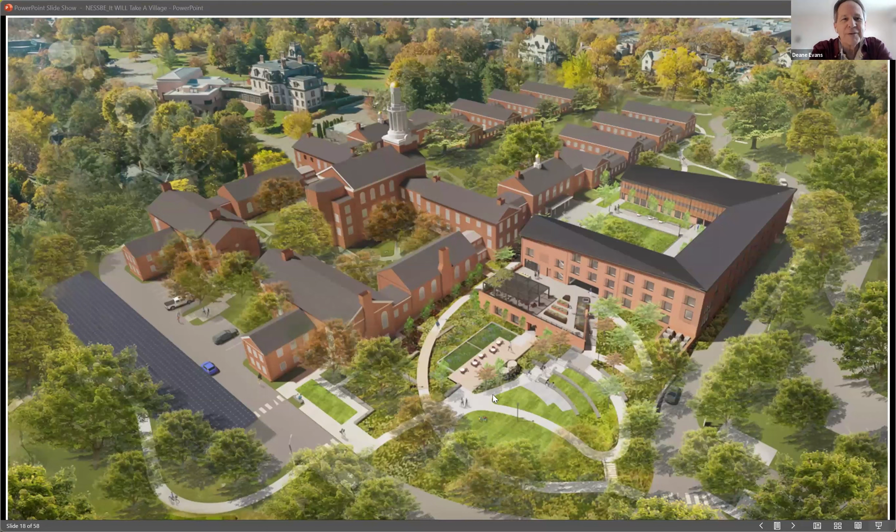So as we close out, I just wanted to make one slightly tongue-in-cheek suggestion: since this is a divinity school, I would try to carve out a special space with the Living Future Institute for an afterlife Living Building Challenge winner, because of the sacred nature of the site and what they study there. Anyway, that was a bit of a reach, but I'll stop there. I'll stop while I'm behind.